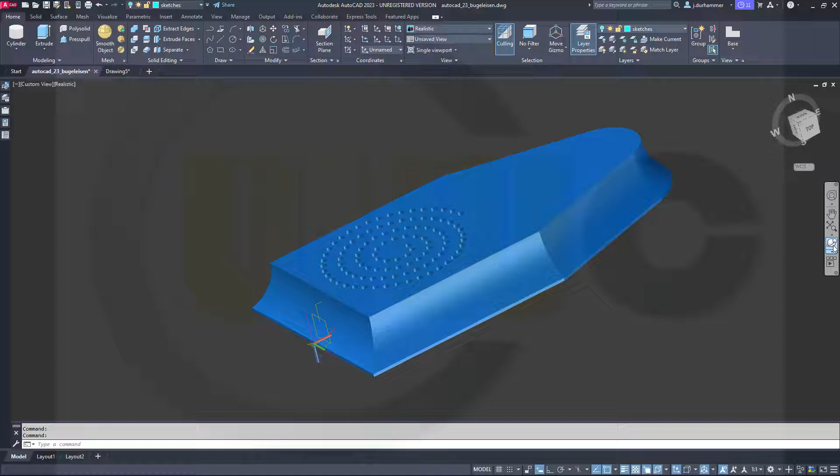Another one of my basic part design exercises, the ironing plate. It's a sweep, an extrude, a cylinder and a spiral pattern. So, let's have fun with AutoCAD.

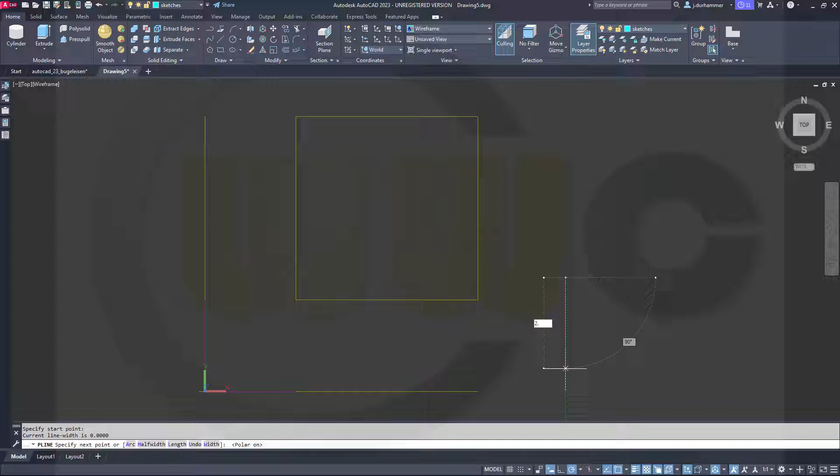Okay, I want to start with a polyline on my sketches layer on the XY plane. So this should have, why is this off? Okay, activate it. In that direction 2.5 millimeter, in this direction 11 millimeter, then it should go up 11 column 29, then 11 straight up, and then over here, maybe like that.

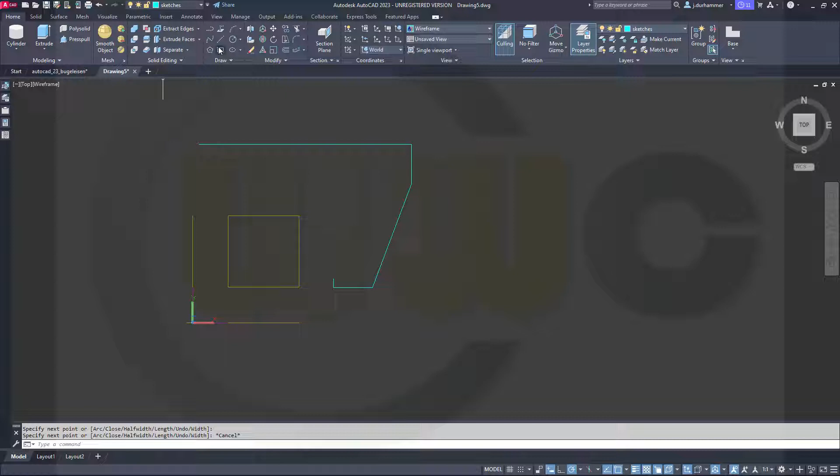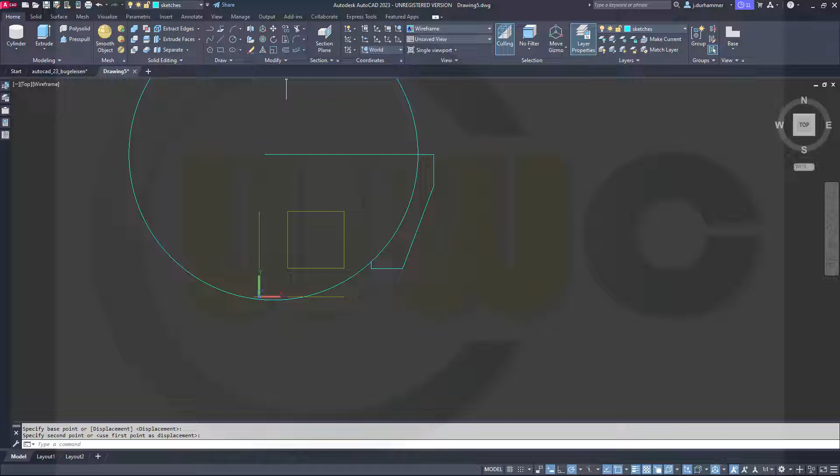I will need a circle, that circle maybe at the end point, and the radius should be 51. Now I have to move that circle, so select the circle, right click, and the base point would be the intersection point of that trace with that circle, and then I want to move it to this end point here. Then I could trim, so go for trim, select them all, right click, trim here and there.

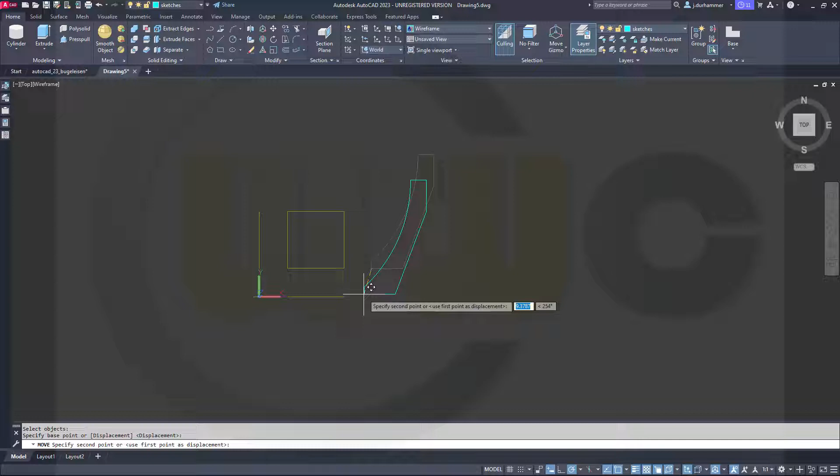Now let's make this a polyline with P-edit, a closed one. Select this, go for join, select that, right click, enter, and that's a closed polyline. Now move this polyline to the origin, right click, select this as base point and go to hashtag 0,0.

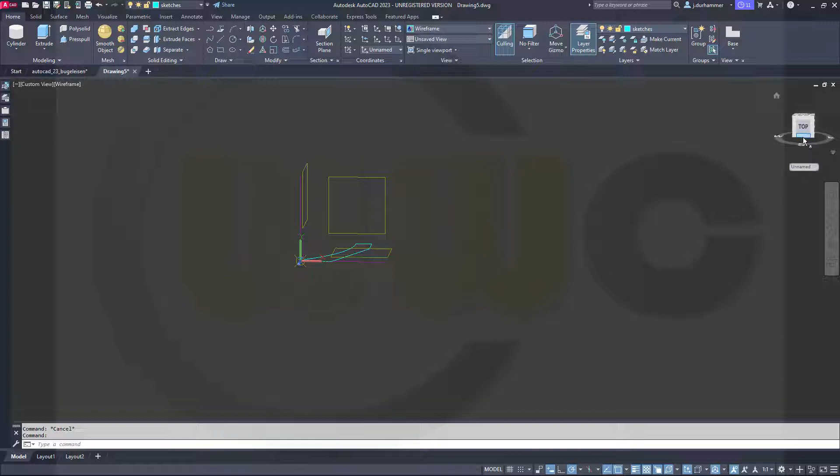Okay, now I have to rotate my axis system around the x-axis. Select it, go here, default value is 90 degrees, so that will do. So that would be this view here. I will need a circle at 280 column 0, radius should be 50.

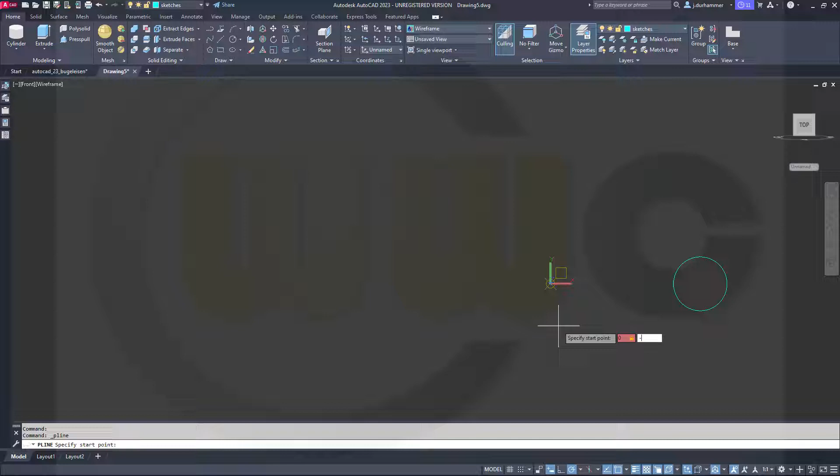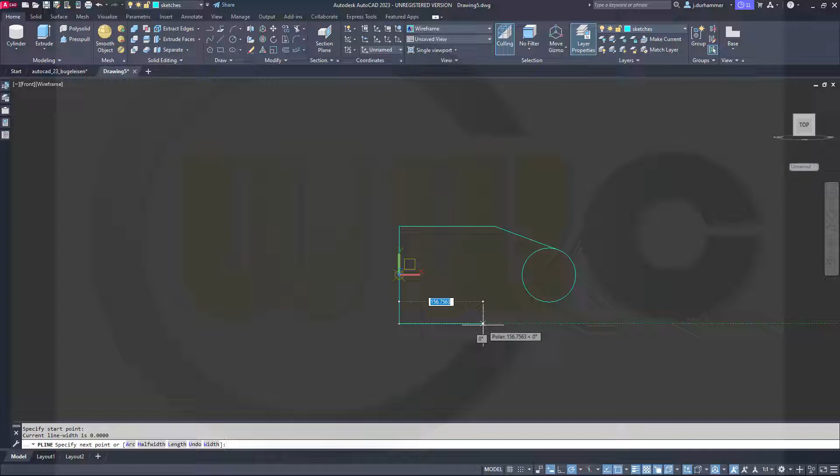Then I need a polyline again, which should start maybe at 0 column minus 90, then go straight up 180, then over there 180, and then control right click tangent to that circle and enter. Now another polyline from this end point in that direction 180, and then control right click tangent to that circle again. Now trim, right click, this should be removed.

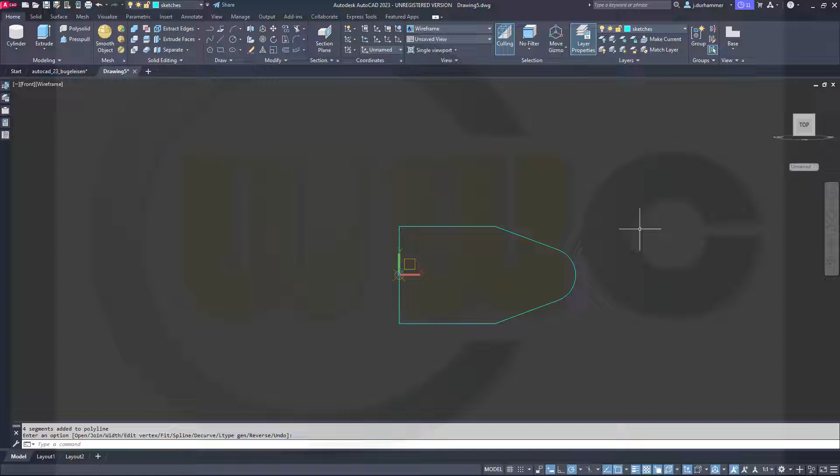Okay, now make this a polyline with P-edit, select one of these, go for join, select them all, right click, enter, and this should be a closed polyline. Now go back to our world coordinate system and make a sweep. By the way, you don't have to draw it like this. In AutoCAD, that section will be aligned automatically, but I drew it anyway like this.

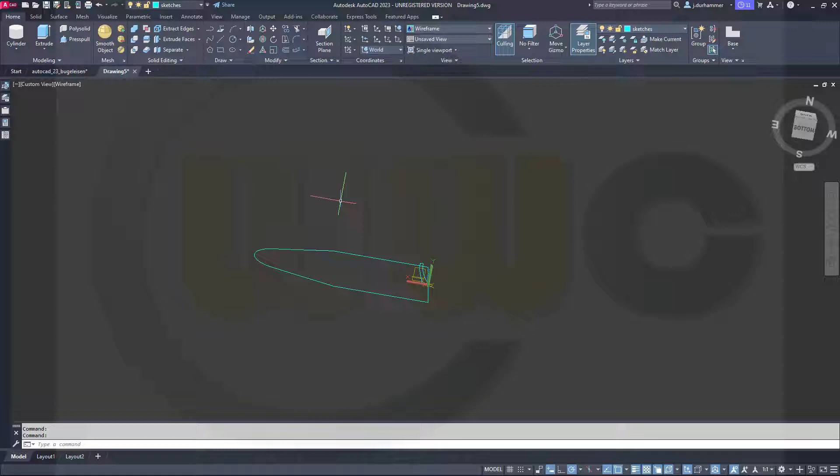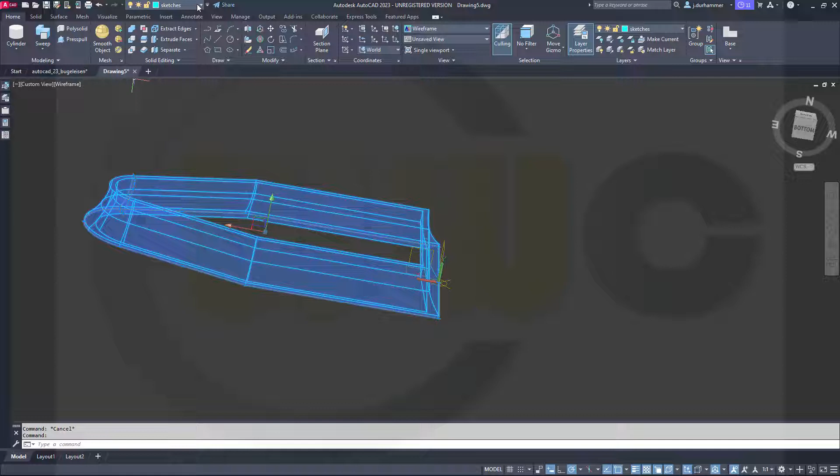So go for a sweep, select that profile here, that polyline, right click, enter, choose the path. Okay, now move this one to a different layer, maybe to the solid layer, and maybe switch from wireframe to conceptual.

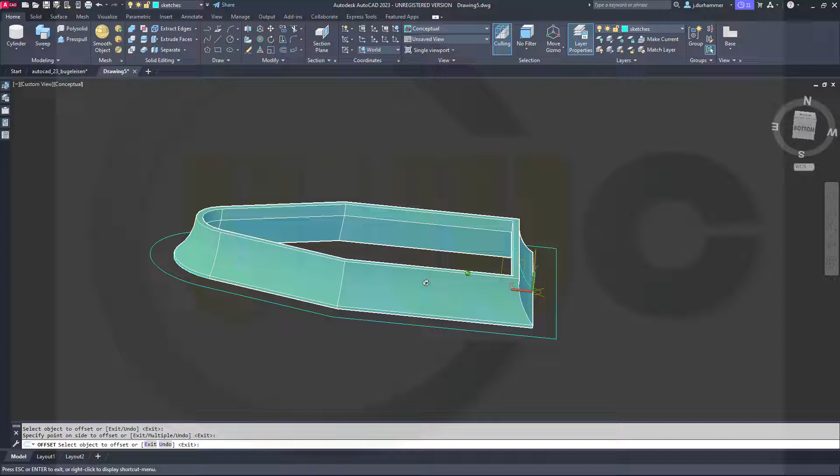Now let's try to isolate or try to select that polyline and make an offset. So go for offset. The distance should be 22, and I want to select that polyline down below, this one, and offset it to the inside. So this didn't work. Why? Because it snapped. So select it once more, that would be the polyline. Move it like this, then it should work, and enter.

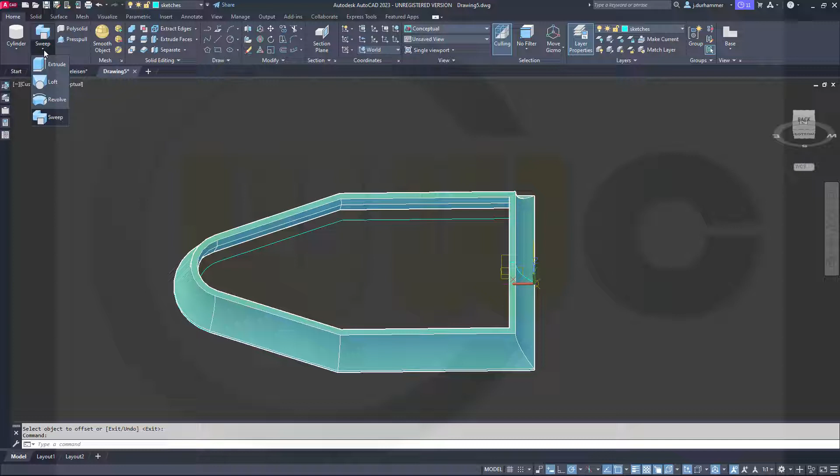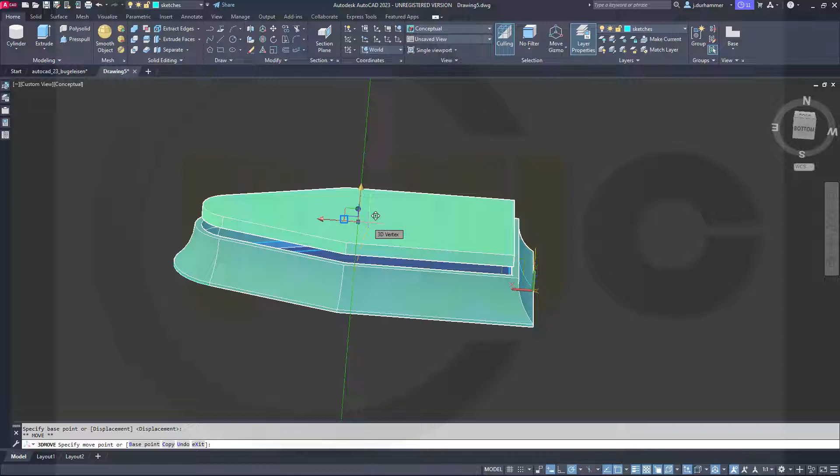Great, now do an extrude with that polyline here, right click, enter, make it 11 thick. Then go to 3D move, select it, right click and go to that arrow here in this direction. That distance should be 29. Now go for a solid union, this solid with that solid, and confirm. Great.

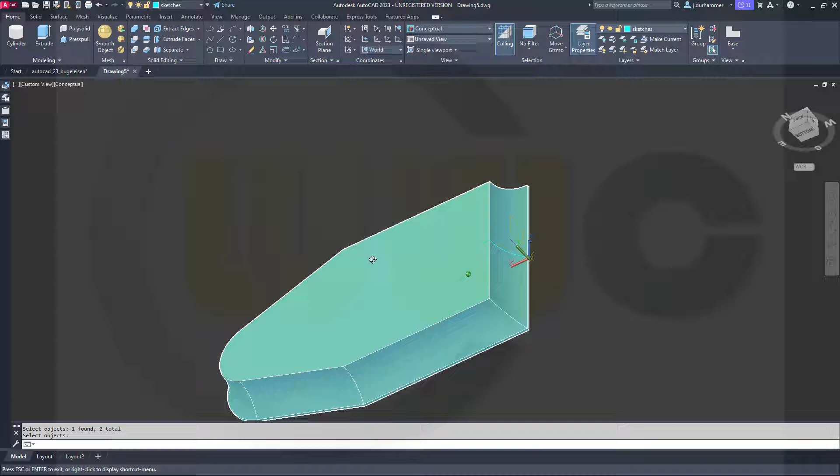Now I will need a cylinder, and maybe I should create a point as reference. I will have to rotate it around the x-axis again. Enter. And let's put a reference point at a certain location. And this one should be at, go for draw, go for that node, and it should sit at 90 comma 0 like this. And then I can use this as reference point.

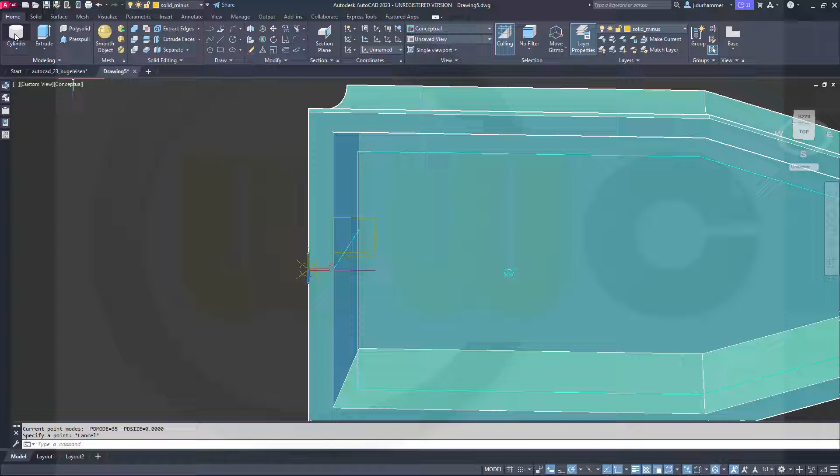Now I need a cylinder. This should be removed, so I go to solid minus cylinder. It should sit here at this point, so go for right click, control right click node, select that node. The base radius should be 3, the top radius as well, and the height might be at least, let's go for 60. That's okay.

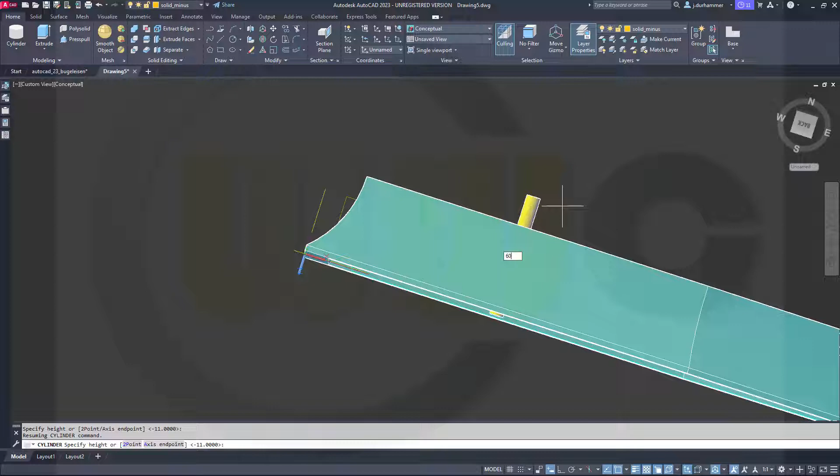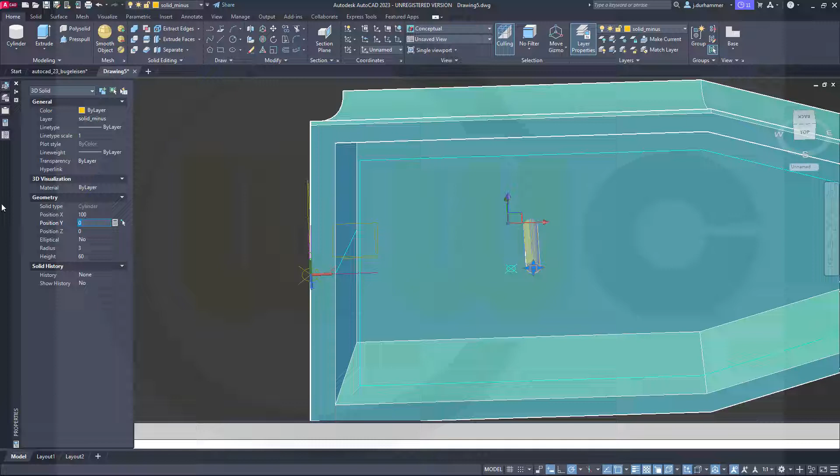Now I need a helix, but this is wrong. It should be 10 millimeter more. It should be at 100. So select it and go to coordinates, and this should be not 90 but 100. Okay, now go for the helix.

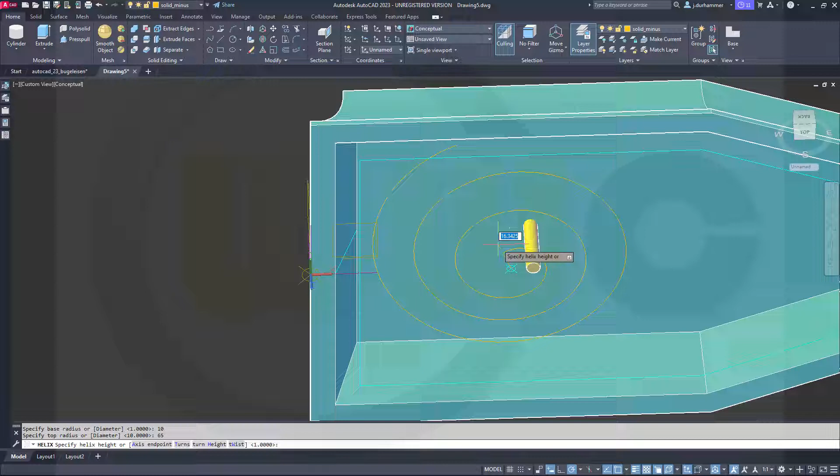The center point should be at that node here. The base radius should be 10. The top radius should be 65. And the height should be 0. Let's take a look like this. Move it to the sketches layer. Check the properties, and it should have 4 turns.

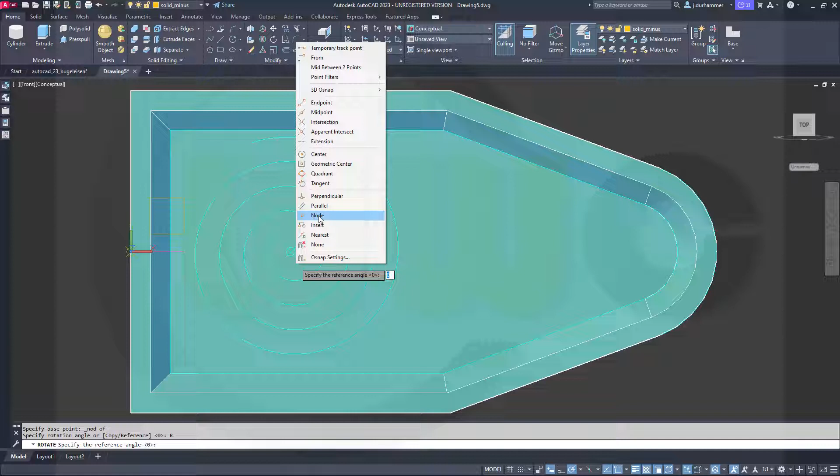Now I want to rotate it, so go for rotate. I want to rotate this one here, the helix. The objects, yes, right click. The base point would be that node here, this one. Now just right click, go for reference, and from the node to that endpoint here, and then move it like this here and snap here. This looks great. Now let's go for path array.

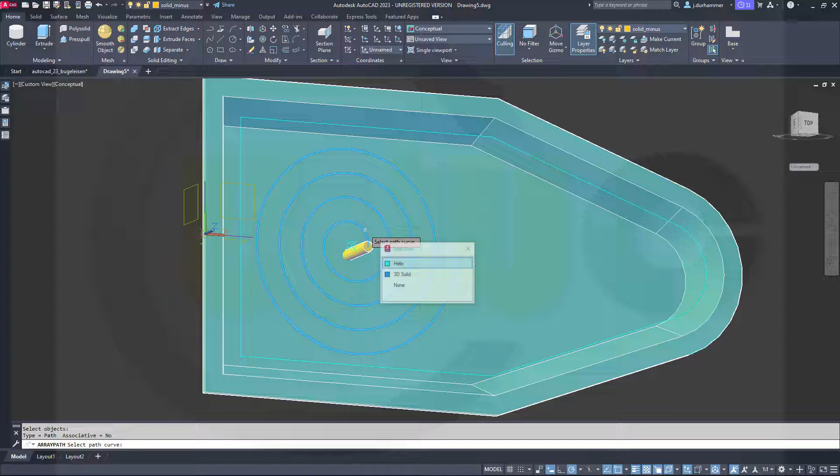That's the object. Right click, and that would be the path, the helix. So it's a little bit more than I expected. In order to make it really precise, you would have to look up the length of that helix. If you want to change here the instances, you just have to click there, then you can change it here, and you need the complete length of that helix. So if you go for associative, you can change it afterwards.

So I want to go for associative and close the array and check the length of that helix. So let's select it and check the length. The total length is about 944. Okay, select this one again, go for array path.

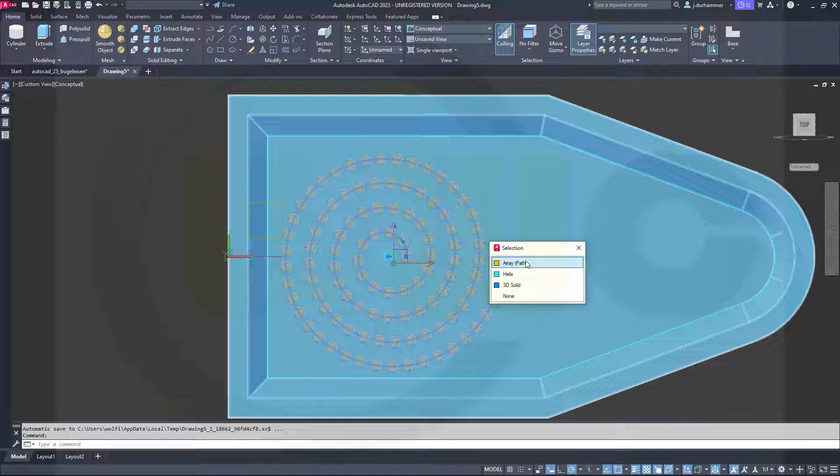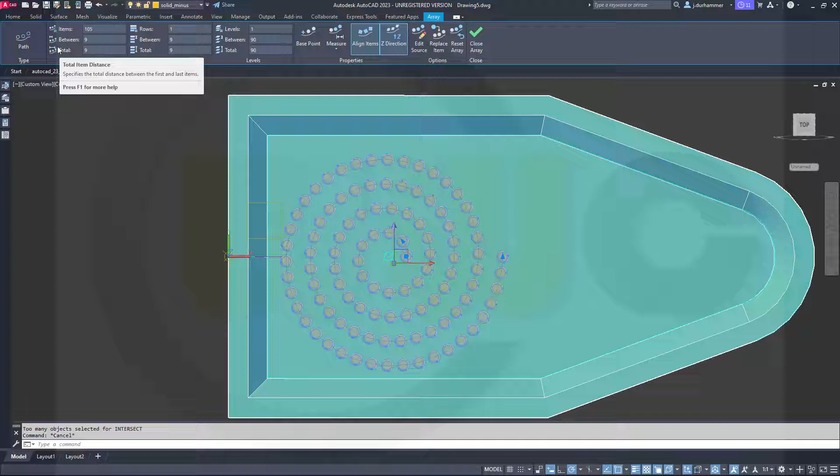I thought it was associative, didn't it? That's crazy. That register card doesn't show up. It should. Now it's here. Okay, then I can change it. It was 940, I suppose. So go here, go to 940, and then change that value here to 80.

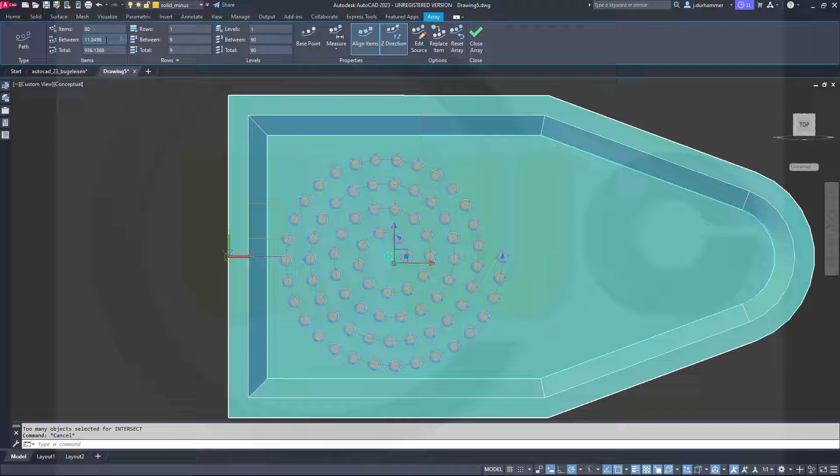And this should be 940, and then it will align this, but it doesn't go all along, so therefore we have to make this a bigger value. So maybe let's go for 14. That's more like it. 80, 960, that's okay with me. And close the array. Don't know what he's talking about.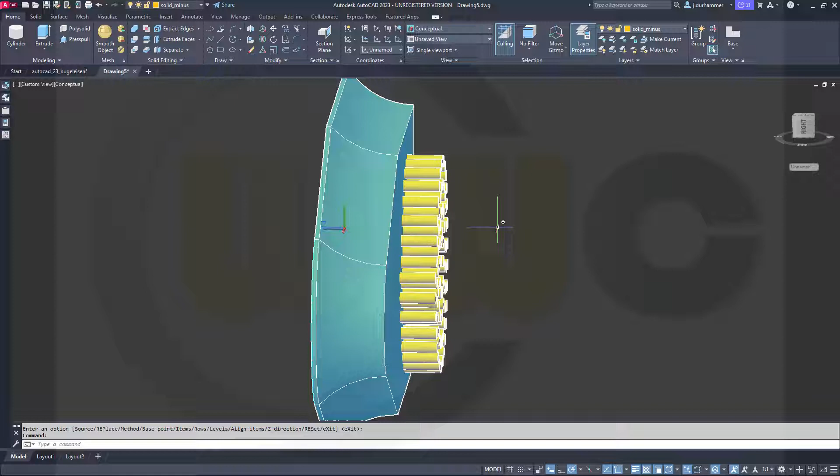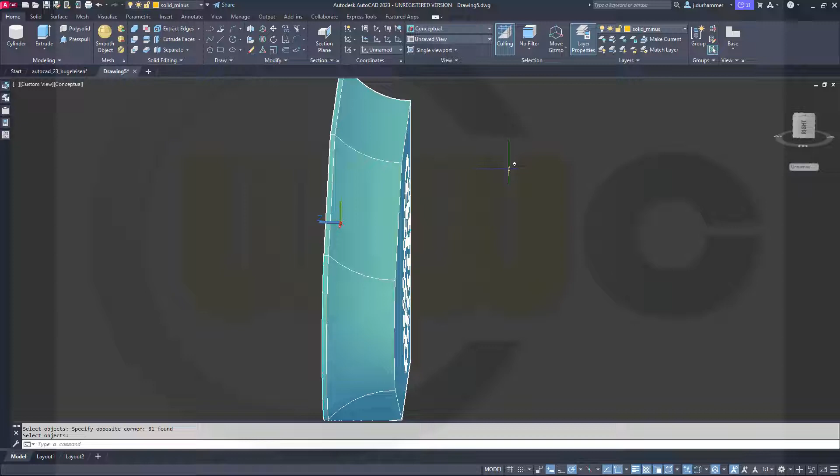Now this should not be associative, but it is. So in order to subtract it, you have to explode it. So where's the explode? There's the explode. Select it, right click, it's exploded, and then you can subtract from this one. Right click all of these. Right click, which should give me that nice spiral pattern here. And I'm done. So I hope it was helpful.